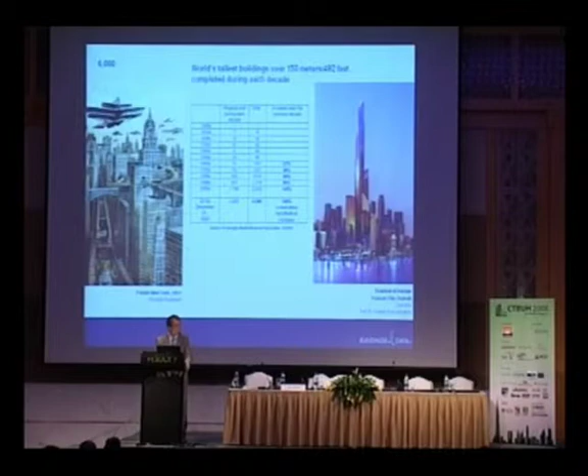Good morning. I guess it's good afternoon now. I'm not sure, but good morning, I guess.

I would like to talk about, I guess, the structure and form. This is a general talk, and in reference to Tower 29, Dubai Tower 29.

Like most projects like this, you have to acknowledge a lot of people. It would never happen without a lot of active people involved. First of all, I would like to acknowledge the architect, TVS, based in Atlanta, Georgia, and Chicago. They were supposed to be here, but I guess they couldn't make it. For some reason, they missed the flight or so.

In any case, I also want to acknowledge Arab Engineers, who will be the engineers of record to build this building. Our involvement is really in the concept of Tower 29, the tallest tower of the group.

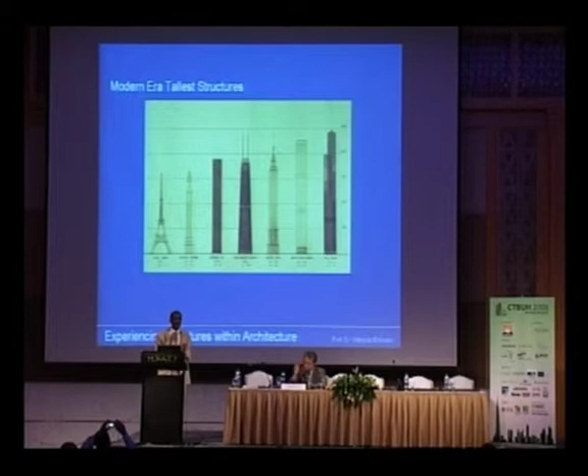Of this modern era, I'm looking at some of these tall buildings, and I'm just going to focus on the buildings in Chicago. The tallest, of course, is the Sears Tower. I don't want to make any judgment on the architecture in any sense, or on the sustainable aspects of the structure or the architecture. I really just want to make the connection between architectural form and structure.

At that time, it became apparent that the structure and the architecture were connected. Structural engineers started developing something called structural systems. A structural system is very important to be able to build a building. It is important to define the economics of the structure, and obviously to guarantee the integrity of the structure standing up.

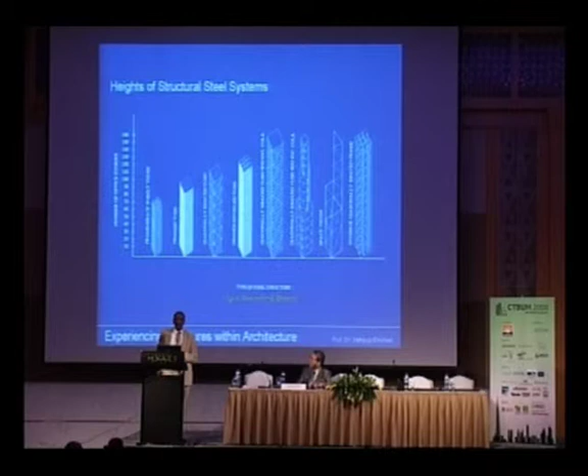I published this kind of chart of these systems about 10 years ago. If Mir Ali is here, he published a book on architecture of tall buildings, and I published this work there. This is about steel structures; I don't want to dwell on it, I don't have time. This is about concrete structures, what the systems are.

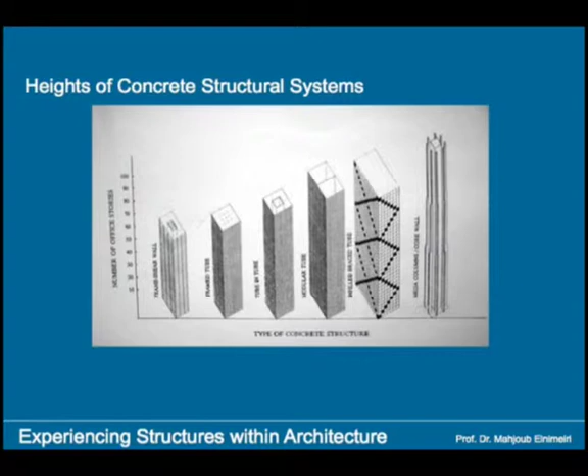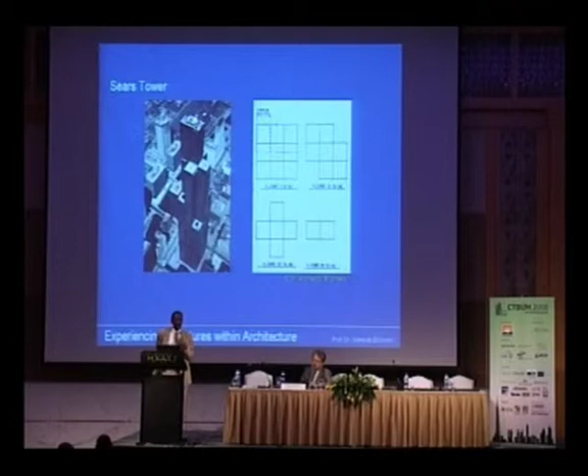But I wanted to talk about Sears Tower for a couple of minutes as a testament of what I call a compatible architectural and structural idea. In fact, I listened many times to the architect and to the engineer who designed the building, and every one of them claimed that he designed the building, and probably most of them are right, in so many ways.

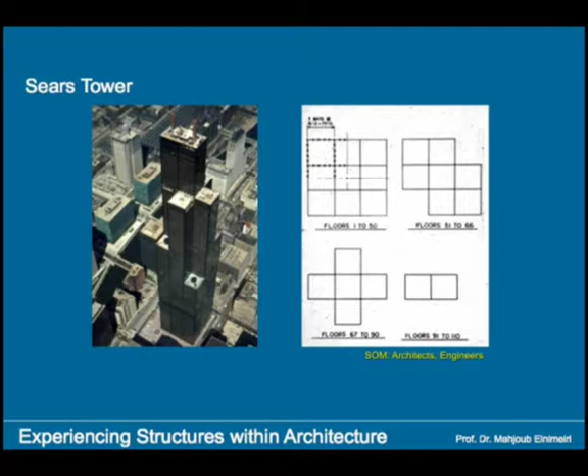We look at the plan at the base. It is what they call a modular system architecturally, and structurally what you call a bundled tube structure. There are 9 tubes at the base, and then the tubes drop off as you go up to the top of the building. Structurally, this is wonderful because the whole idea of bundling is to add stiffness to the system. Architecturally, it is wonderful because you don't need as much space as you go up in the building.

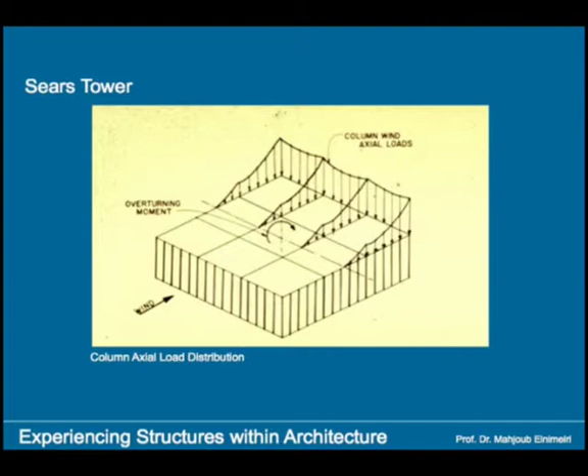This is the structural idea of the stiffness, essentially to mitigate what they call shear lag. In other words, if you have a very thin tube, it will be subjected to very serious shear lag, and this is one way of mitigating it. This is a structural system. It's very simple, very straightforward, and manageable.

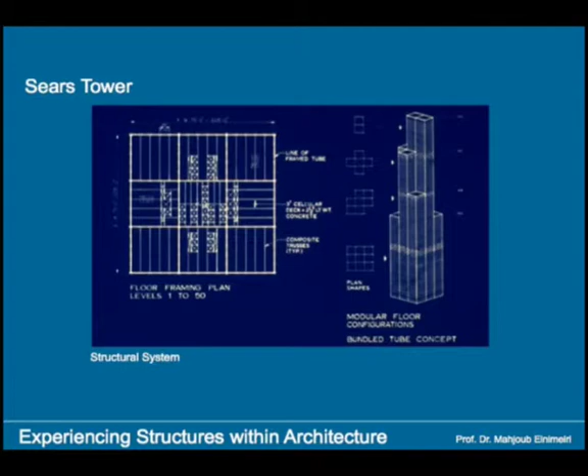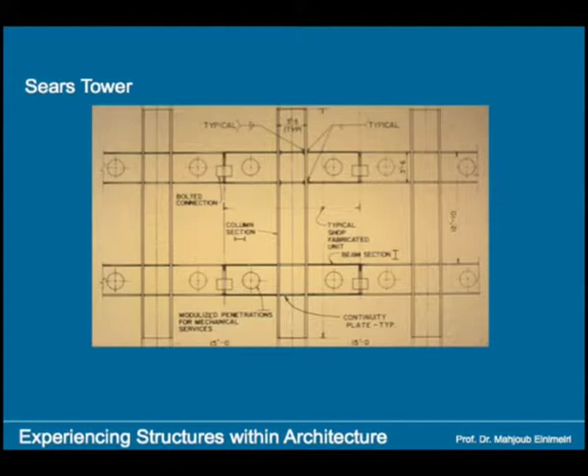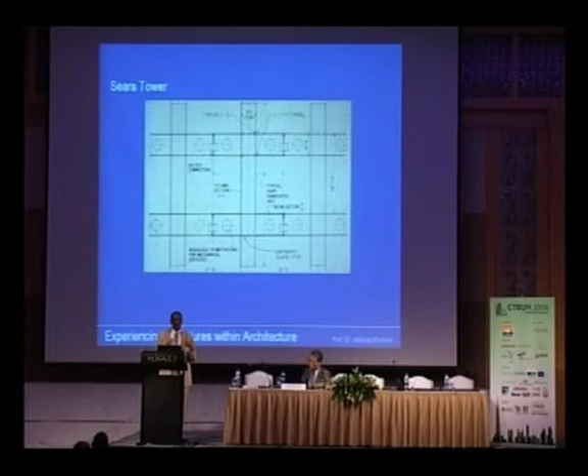At that time also, there was an important concern: a structure is a structure only if it is realized, only if it is buildable. So structure was driven by construction. So now we're saying architecture is driven by structure, and structure is driven by construction. In other words, the structural system is embedded in the idea of how you are going to build the building. You have to address that question.

This is exposed concrete structure. There is no cladding, and this is a concrete building. Of course, when you look at the bracing, you assume, wow, this maybe is a steel building. It is a concrete building. It's an exposed concrete building. In fact, it's the first concrete braced structure in the world.

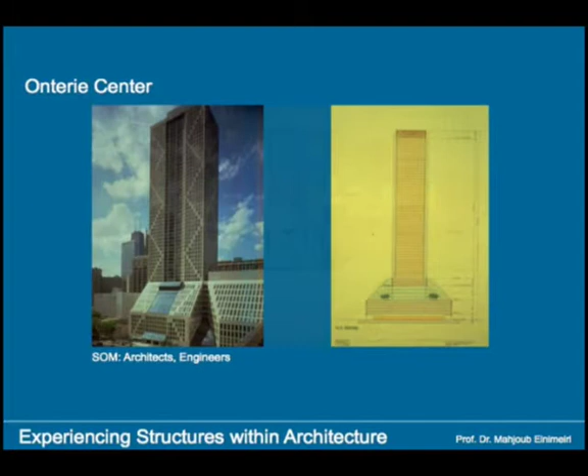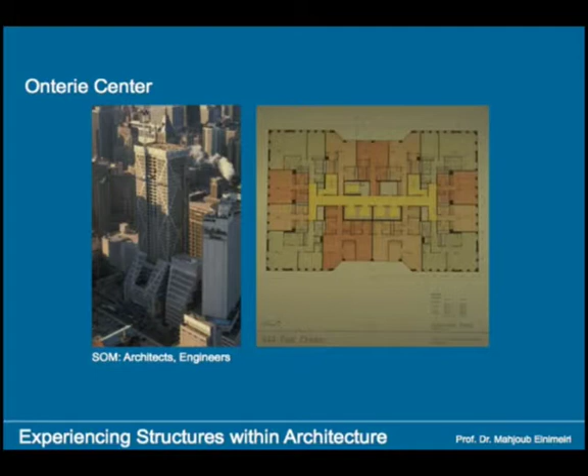So, conclusion of these sets of slides is twofold. Number one, there is a complete interaction or the complete integration between architecture and structure. In fact, at one time, a very well-known architect by the name Myron Goldsmith termed this type of architecture what he called structural architecture. In other words, architecture is the expression of the structural system.

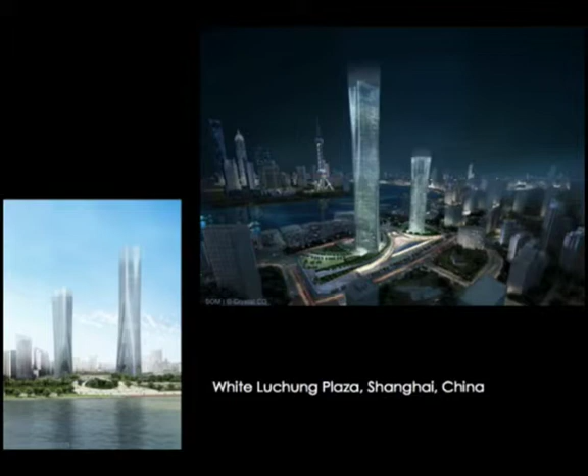This is what I call the architectural form of today. I'm jumping maybe 20 years between what is happening in Sears Tower and what is happening today. And I'm just going to go over these slides without making any comment at the time. Some of these buildings are built, some are under construction, some are under design, some are in research phases. But they're all developed from real programs, and like I said, some of them are built.

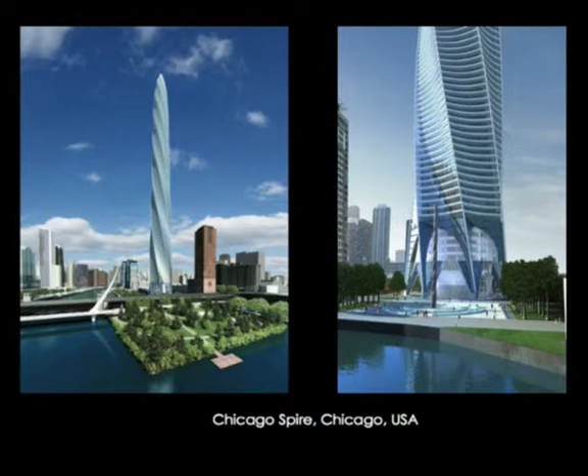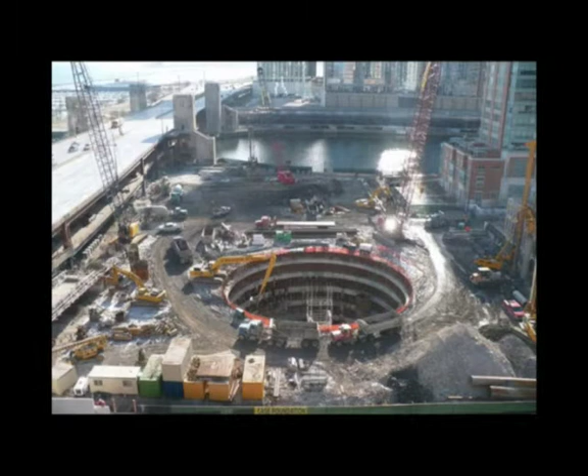Again, I'm not talking about sustainability, or making any comments about the architecture. I'm trying to make the point here about what really happened to architectural form in the last 30 years, what is the relationship between structure and form in this time, and how the structural engineer would react to this kind of architectural form.

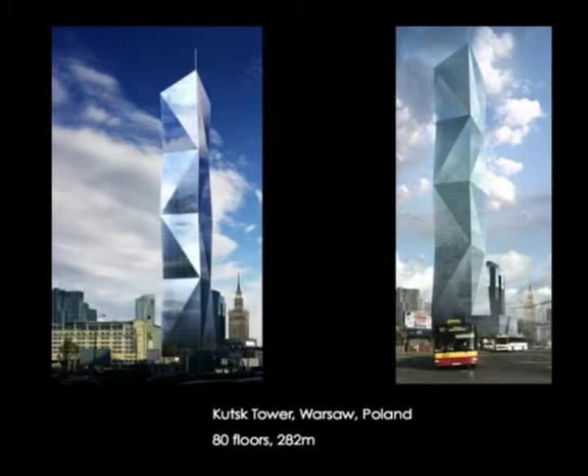So, one more. The Calatrava form. We did a lot of study. I'm also a practicing engineer and chairing a consulting firm by the name CDCI in Chicago. It's an international firm, and we do a lot of work in this area. However, this study we did in our class in the school, to look at the spire and to see how, again, to mitigate the structure of this form.

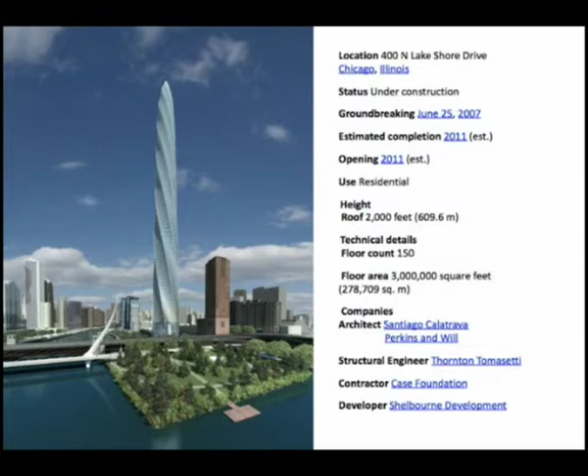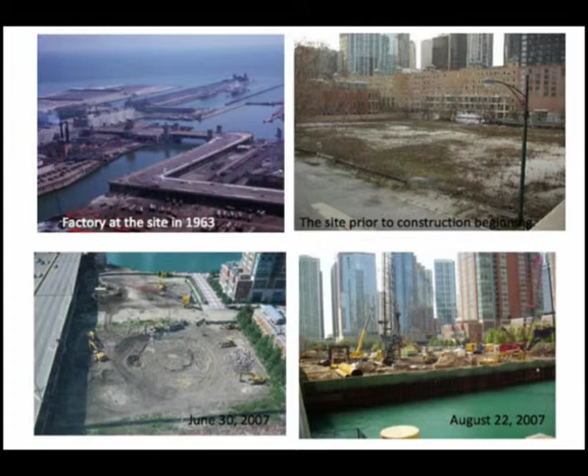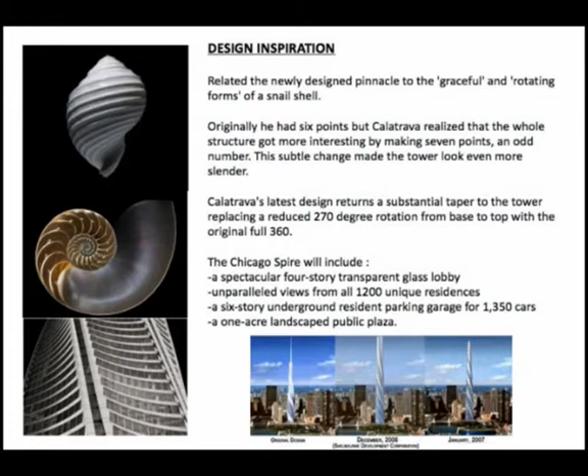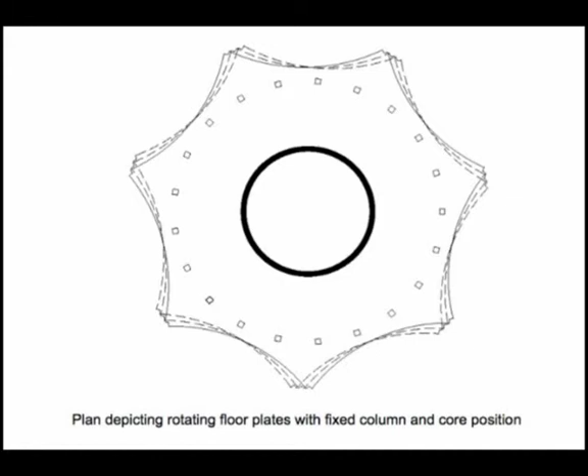I wanted to go back to the structure. So where is the structure? The structure here has no relation to the form. The structure is the shear wall in the middle. When you look at the architecture from outside, it is a twisting tower, 360 degrees. But the structure is not twisting. The structure is not moving. Even the slabs are not moving. The slabs are worked out in a certain way to give that impression. In other words, the structure is not integrated completely into this architectural form.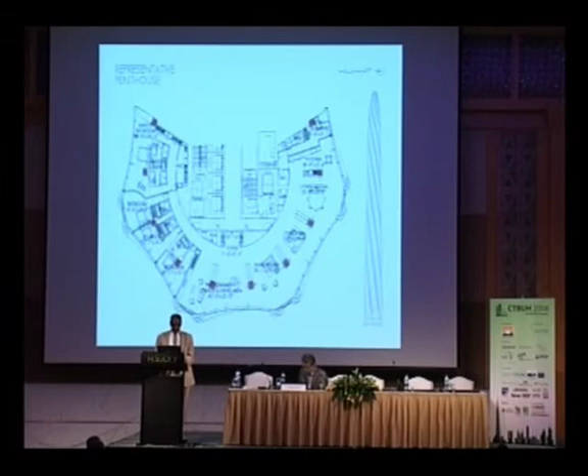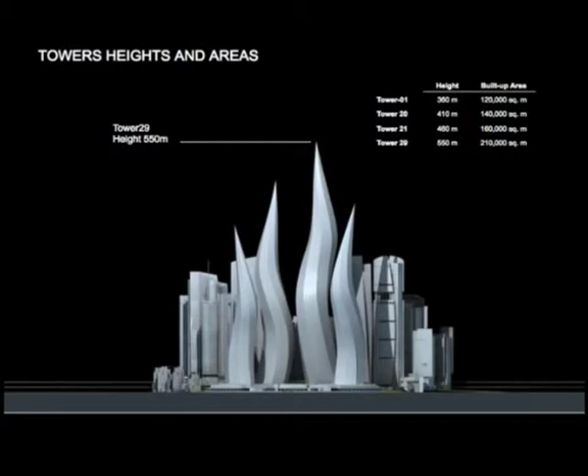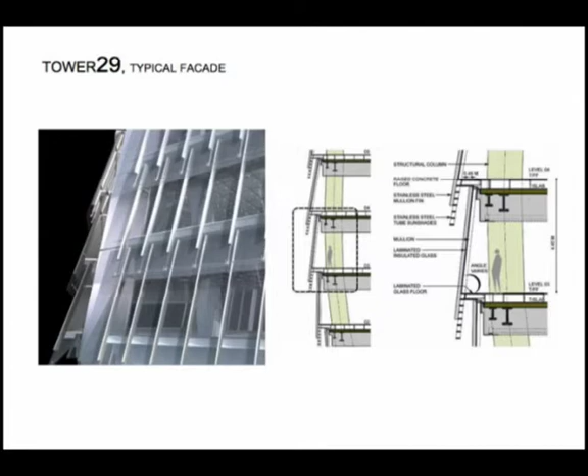This is just one thing I wanted to mention here, and I'm going to skip this. Okay, I'll walk you through the building. This is the lagoon structure. Tower 29 is the tallest one, 550 meters tall. You can see it in the background here. This is a rendering of the form. Werner Sobek is also working with us on the exterior of the building.

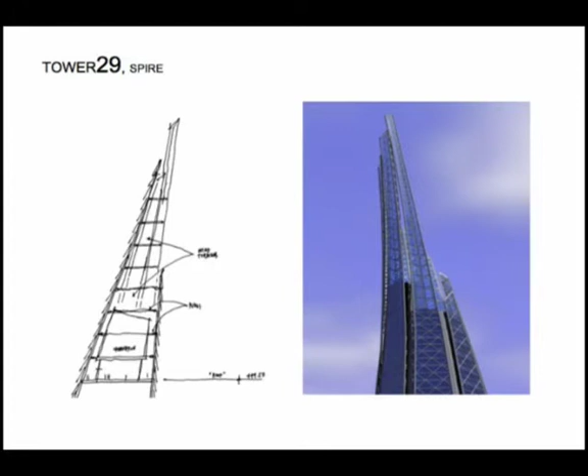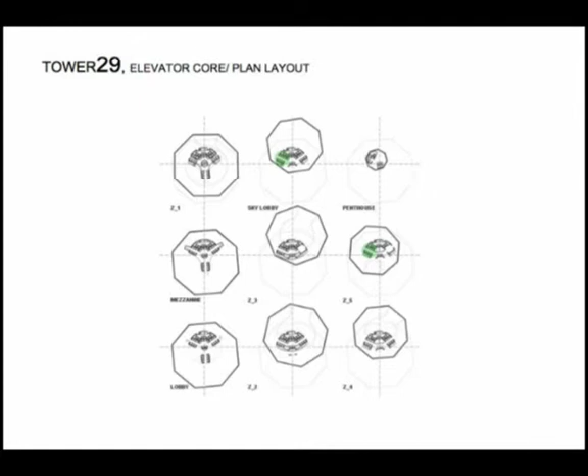So this is the spire. It's called the crown in this one. There are atriums, again, to mitigate certain issues of light. Elevator system. Again, I don't have the time to dwell on it. I have to talk, if I can take just 2 more minutes, about the structure. So, how do we look at this structure?

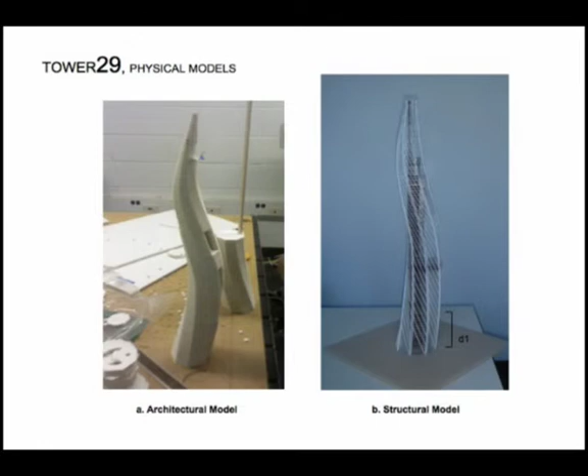My research and my way of thinking is that I have to find a way to integrate the structure within the architectural form. In other words, to take advantage of this form, to see how that form is useful in helping the structural system. There are a lot of issues, and unfortunately I don't have the time. It is in the publication, it is in the proceedings.

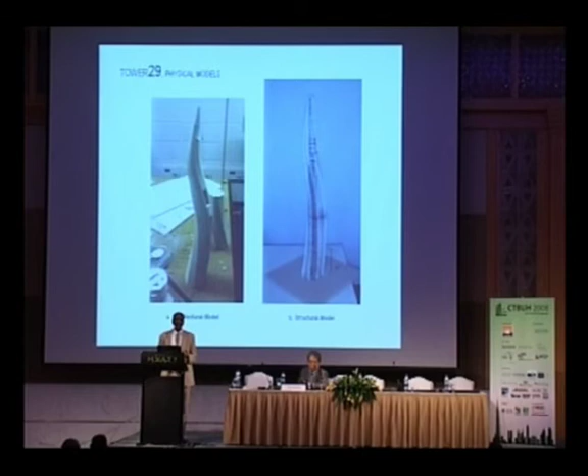But this is something I did for the first time, I never really did before: to build a physical model, an architectural model to the left and a structural model to the right. And why am I building the model? First of all, to see if this building will stand up, just to look at it. And what is the balance? To use this geometry so that we can balance things out. I guess I'm running out of time.

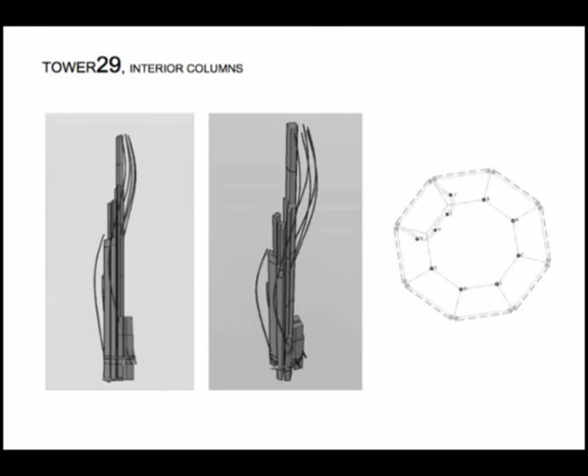I was going to talk about the form, how we generated it mathematically, and how we integrated the structure into it. We wrote programs to integrate the structure with the form, what we call a parametric study of this form, to see how at the end we tune the structure to satisfy all the requirements of the structure: the stability, the stiffness, the dynamic response of the building, and so on and so forth.